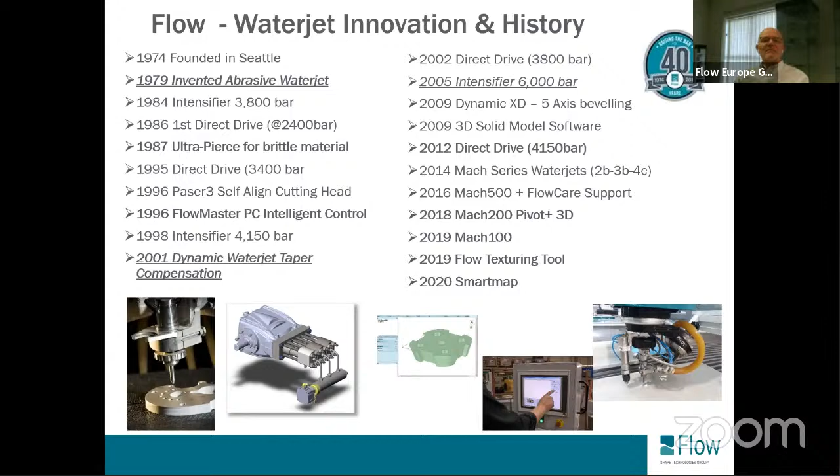One of the reasons that companies do choose to buy Flow Waterjet is that we make everything with the system. It's the Waterjet machine tool, the control software, the ultra-high pressure pumps, of course, and the cutting edge technology, similar to what you see on the screen with the Pivot Plus used in the stone industry.

We put a huge amount of money back into R&D every year, and that drives the technology, not just to keep Flow ahead, but also to benefit our customers.

And for our success, we've built on our customer service, our technology leadership, of course, and we've driven product development. We operate globally, so you will always find Flow representation and Flow support wherever you are in the world.

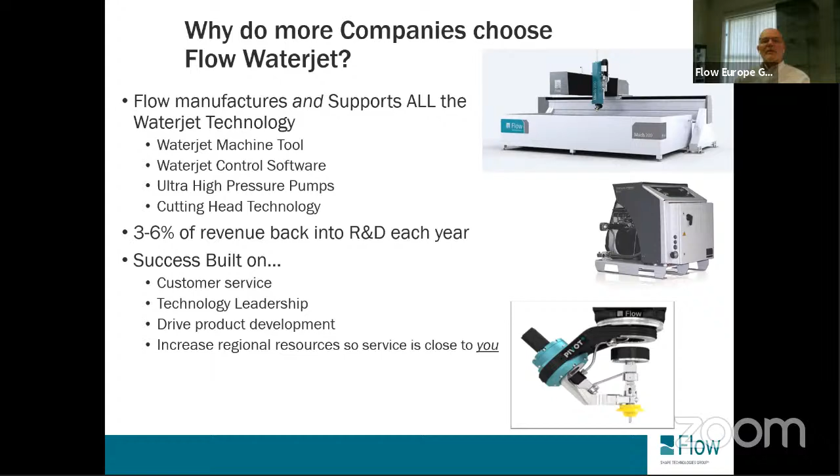Of course, we're here today to talk about very much the stone industry, and Flow's been involved in this side of the market for a long time. Anything from cruise ship interiors, aircraft, composite panels, countertops, and latterly engineered stone, where our technology has very, very real benefits.

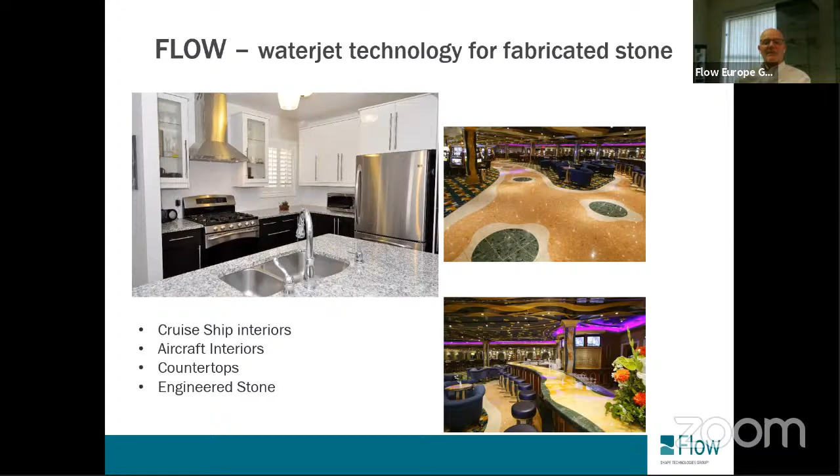We have a standard range of machines, and within that range, we have options that we tailor to the customer's needs. We're also one of the very few people in the industry that would make the direct drive pump technology and the intensifier technology, and we choose the best option for the customers.

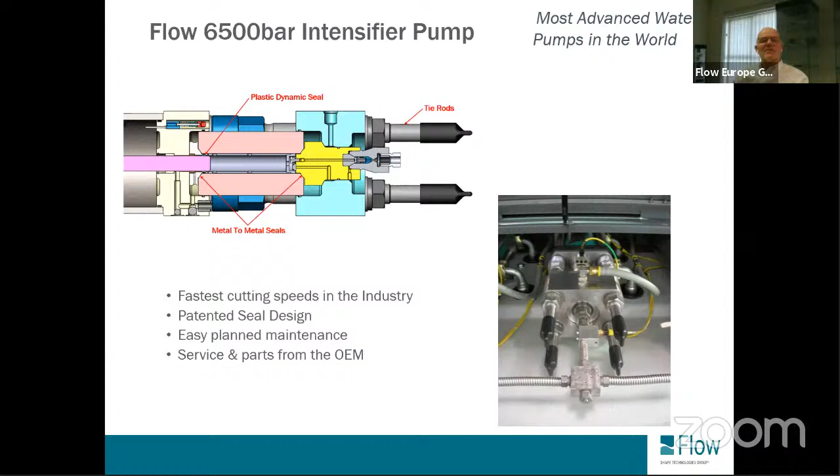Direct drive and intensifier basically is still taking 4-bar inlet water pressure and building it up to 4,000 or 6,000 bar, but they do it in different ways. The intensifier we can use for 6,500 bar for the fastest cutting in the industry.

But generally in the stone industry, glass industry, composites industry, the pump of choice is the direct drive Hyplex prime pump. It's 92% energy efficient, which means you need less electrical energy to get the same result.

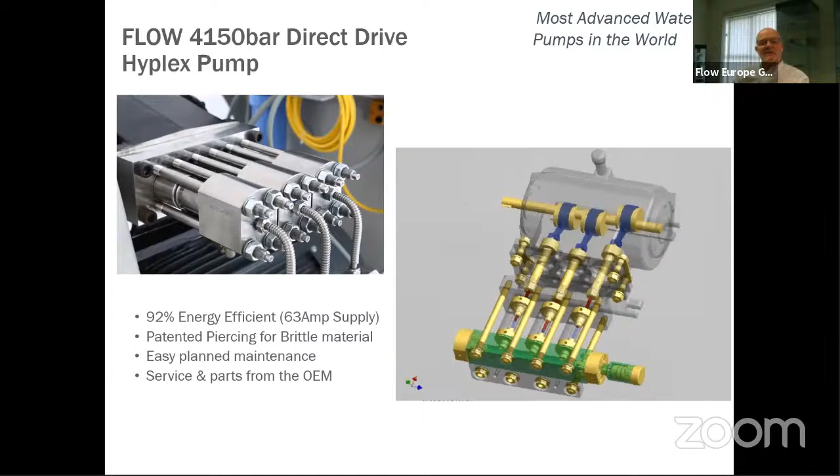A big part of what we do is support. So we mentioned the Flow Technology Centre, and of course, with our single point support, we have field service engineers, we have regional technology centres.

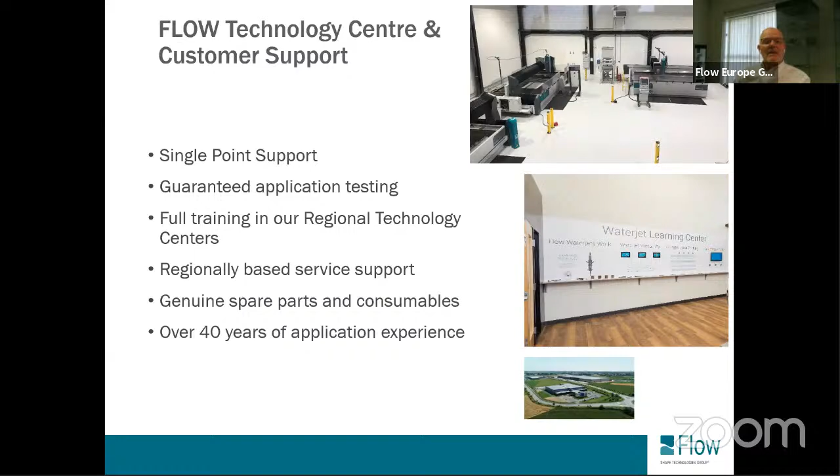And for the customer service side, as well as the engineers, we have customer service people who will help with spare parts. We have an internet web shop.

And with our FlowCare service packages, we have planned maintenance and fixed cost of operation, so customers can leave everything to us.

We also have support for legacy systems, which is very important as we have systems over 25 years old working out in the field.

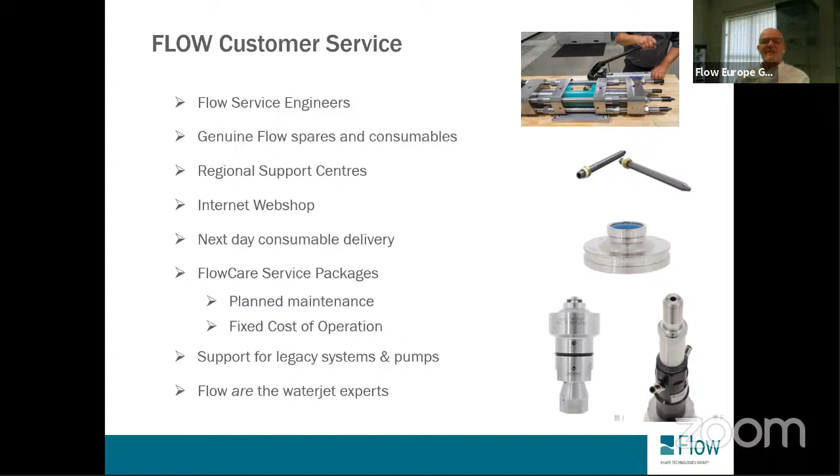So that just brings to the end the overview of the company. We're now going to have a look at the Mach 100 system. So I'm going to run a short video here and just talk around the features that we have.

So this is the Mach 100, which is a precision 3-axis waterjet system. We have hundreds of these installed worldwide. Flow are the OEM, so we make the entire system, including the pump software, cutting head technology.

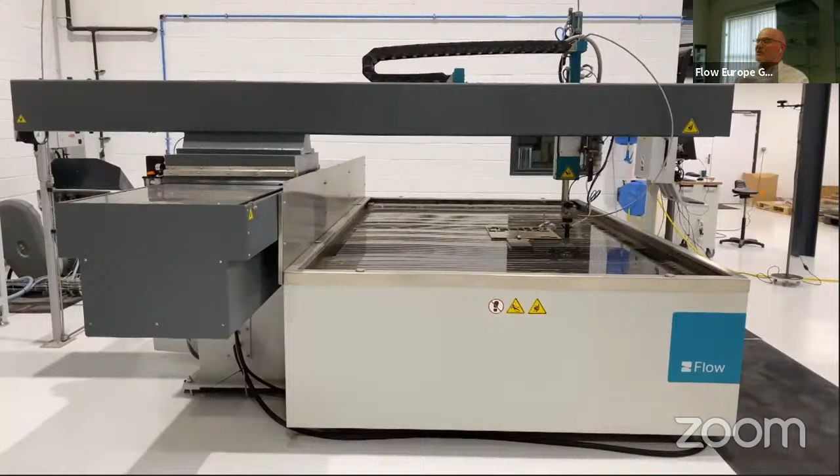The machine shown here in the Technology Centre in Lille has a very robust, fabricated stress relief frame for accuracy and performance, and a separate catcher tank for stability. The very rigid open gantry construction allows three-sided access, which is very convenient for the operators.

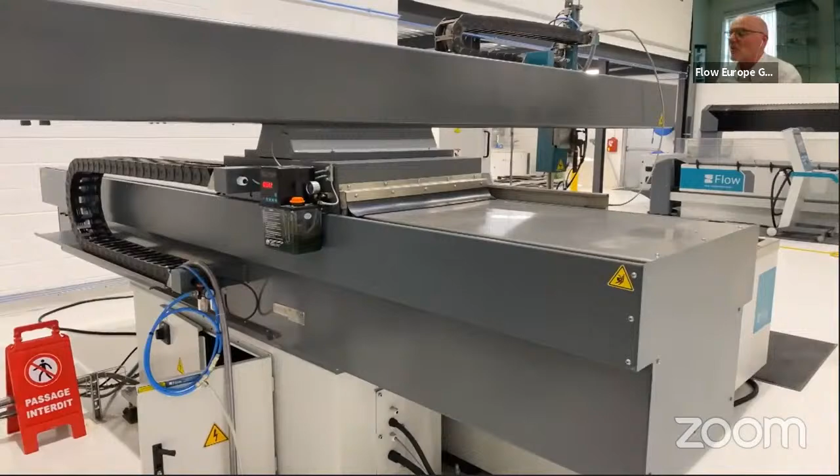And we have an auto lube system, which gets lubrication to the slides and to the ball screw, which are underneath the covers that you see here.

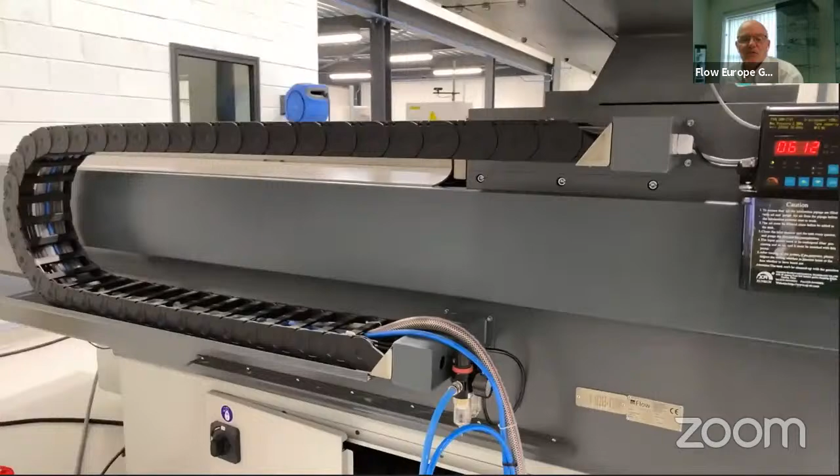All of the Flow systems, the Mach 100, 200 and 500, all use the same Yaskawa AC digital drives. And for the motion system, we're using Omron PMAC motion control, which is driven from the Flowmaster software.

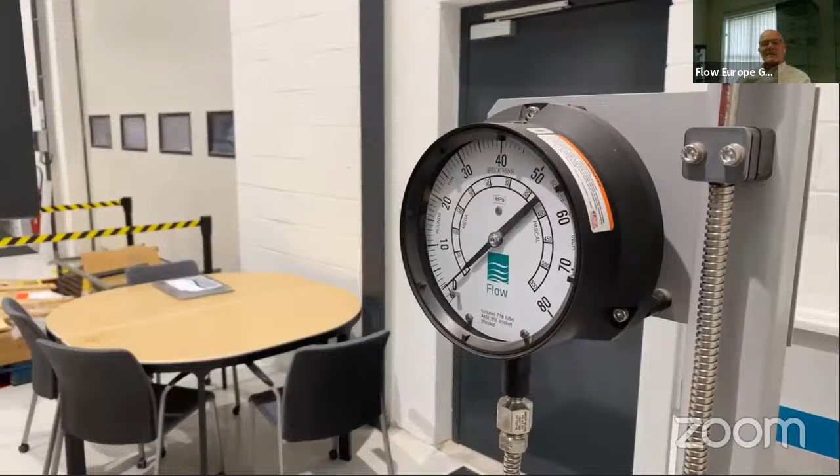There's no G-coding required, no post-processor, so you don't need any experience. You'll just see there the light guard post for safety. That's a CE requirement. And we also have an analog high pressure gauge situated at the back of the machine so the operators can see where the pump is operating.

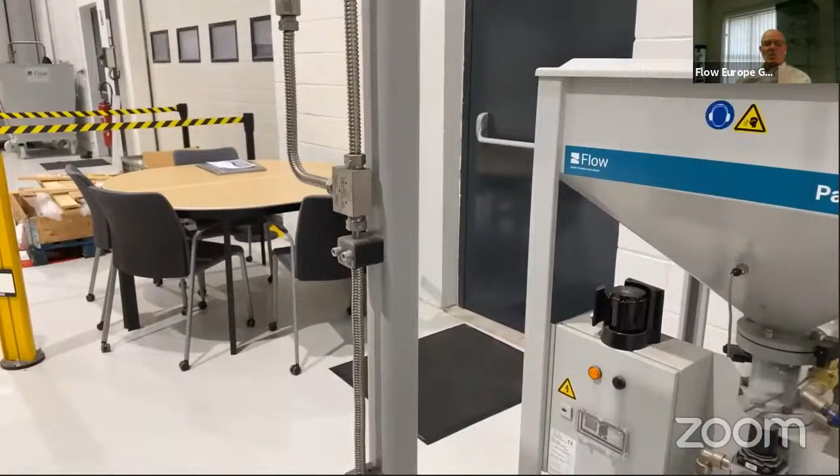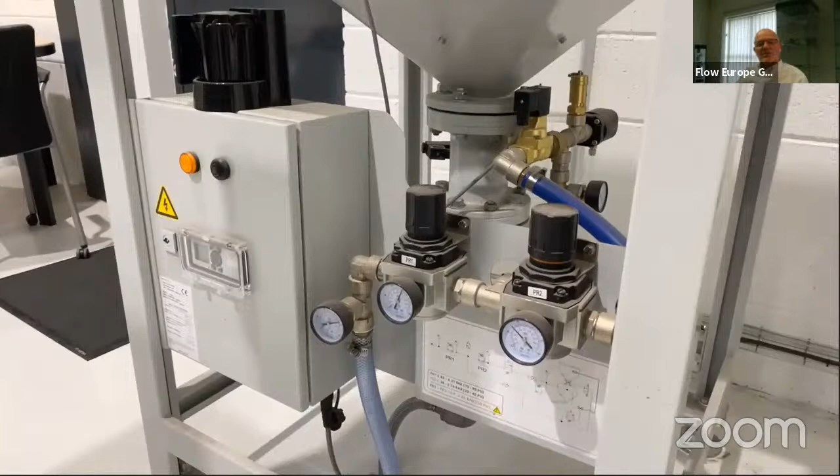Moving on to the abrasive bulk hopper, this is where we store the abrasive. It's garnet abrasive, and it's a dual stage system, so we can actually fill the system while we continue working. We then just use compressed air to move the abrasive from the bulk hopper through the machine and up to the mini hopper, which we'll be seeing in a little while.

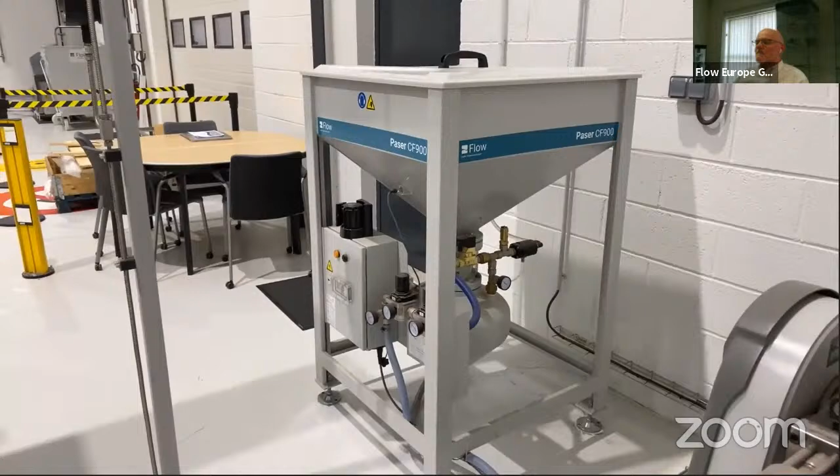Flow is the most widely installed ultra-high pressure technology in the world, and the Hyplex Prime pump is rated at 4,150 bar and is 92% efficient.

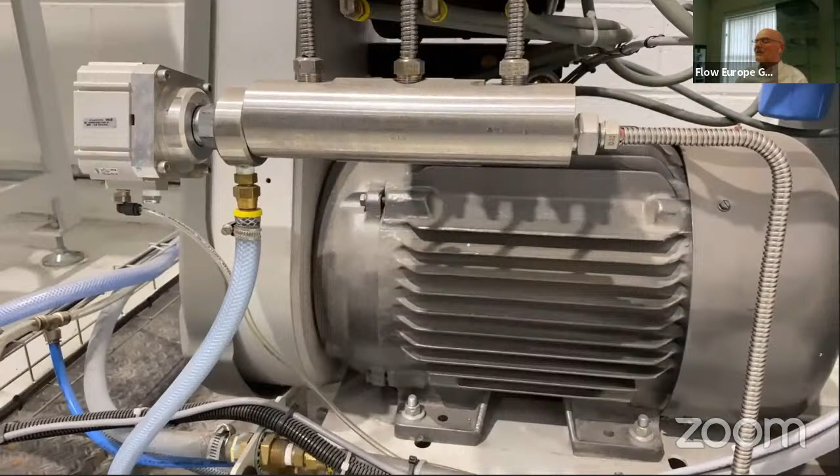Flow's direct drive technology is based on years of experience and requires less power than other pumps and generates exceptional performance. 3 ceramic pistons convert 4 bar inlet water to 3,800 bar continuous operating pressure.

Flow's patented pressure control valve eliminates the need for a second dummy cutting head to balance the pressure or changes in orifice size that other systems may need. It's fully integrated into the Flowmaster control and specifically designed to work with the Mach 100 system, with control of low pressure, high pressure, and diagnostic information.

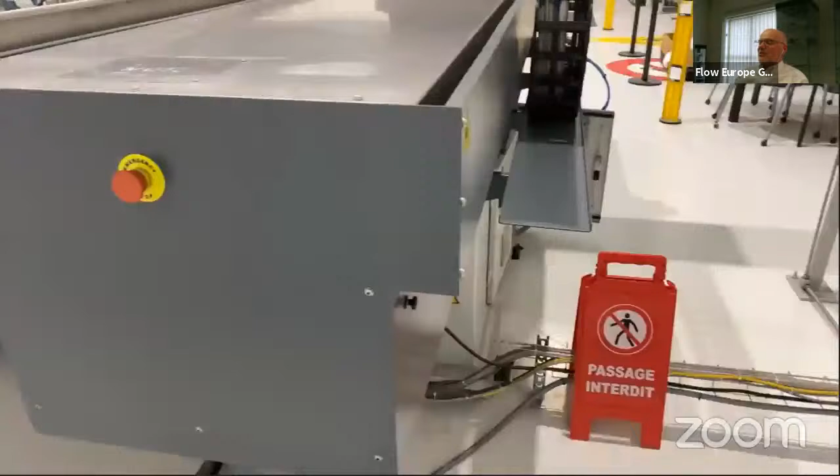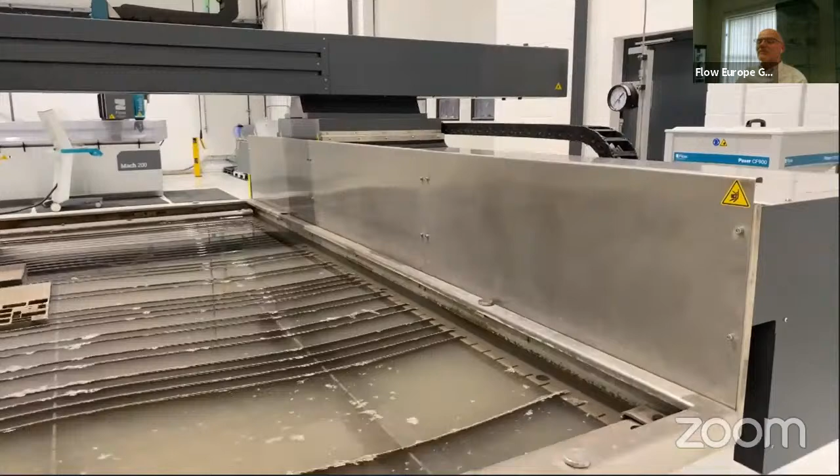As we mentioned, we have a separate catcher tank, and this ensures accuracy and protects the motion system from temperature changes and material loading. The stainless steel slats and supports help protect the cut materials, the slabs, so you don't get any impact from mild steel.

And there's an optional abrasive extraction system.

The PC Flowmaster control is used on all of our machines, and it's using the Smart Stream mathematical models, so no waterjet experience is required. Just click on the material thickness and Flowmaster does the rest.

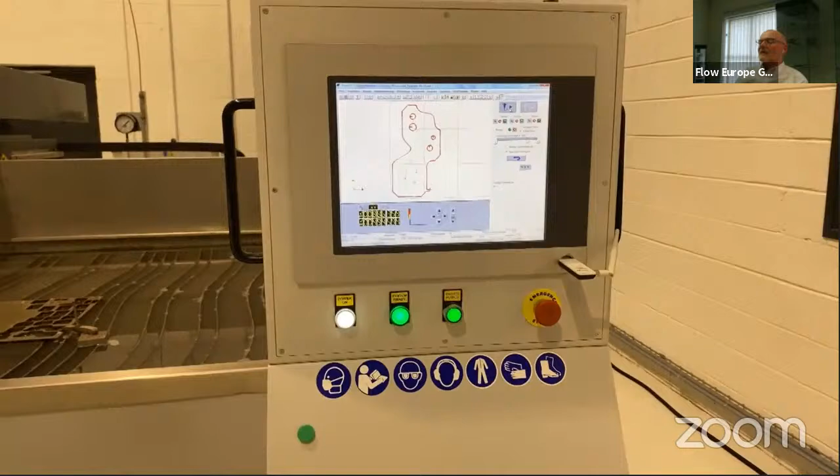The software opens standard geometry and allows all the cutting parameters to be placed automatically.

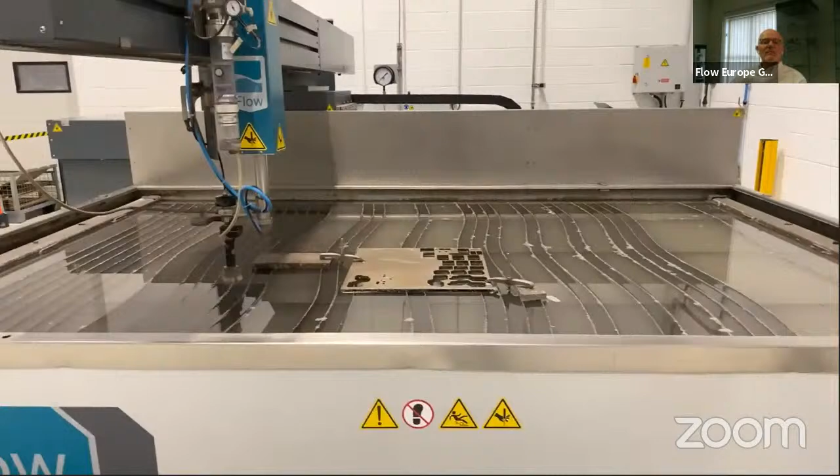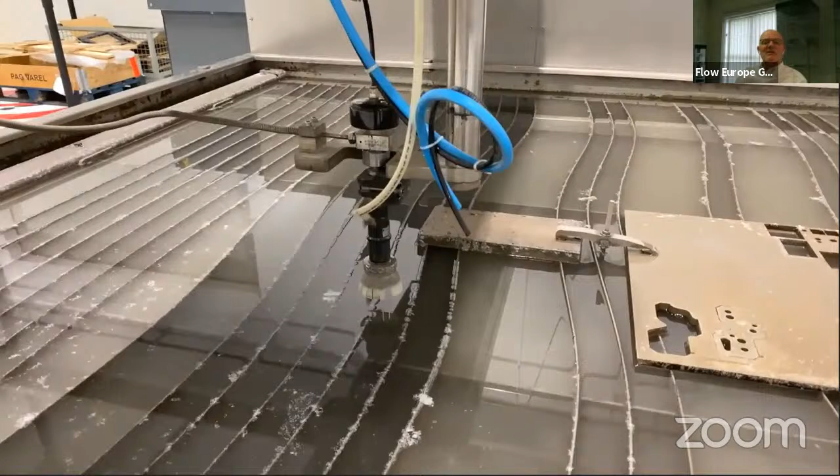The Paser 4 cutting head is the most advanced in the industry with only 2 consumable items. The mini hopper provides exact abrasive dosing down into the cutting head, and the ultra pierce technology is always used for consistent piercing of engineered stone without breakage or damage.

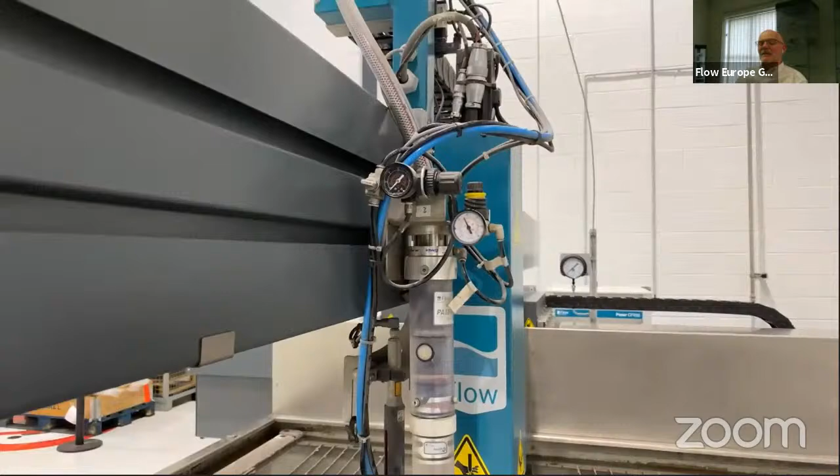This is a Flow patented technology and is used extensively in the stone, glass and composites industries.

The Mach 100 is a complete turnkey system for 3-axis waterjet cutting, with full technical support from the manufacturer, plus the Flow Care programs for operation.

This gives a planned maintenance schedule, delivered consumables, and of course we have the guaranteed cost of operation.

We're just going to move on now to an exciting feature that's been introduced, which is the Flow texturing tool.

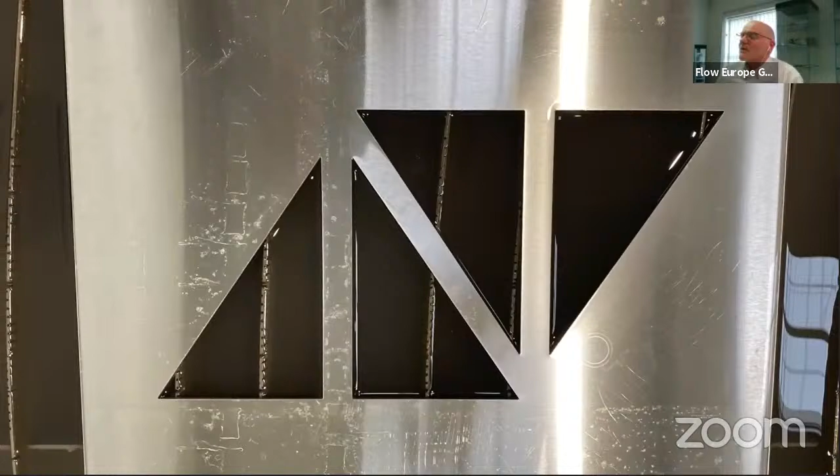The Mach 100 system can simply and quickly be changed from a cutting machine to a texturing machine. The air-driven rotary head with 4 nozzles uses pure water, so there's no abrasive.

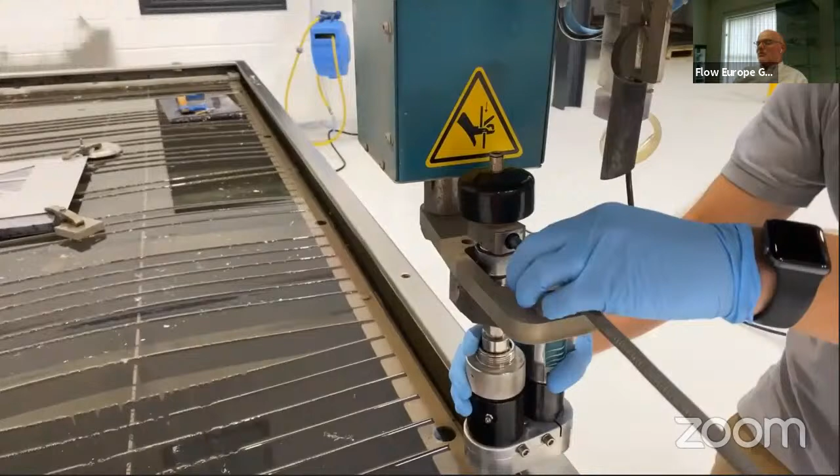The texturing tool utilizes the standard cutting head mounting bracket and the high pressure fittings. We're also using the standard air fittings that we're using for the ultra pierce and for the cutting head. So changing over is about a 10-minute job.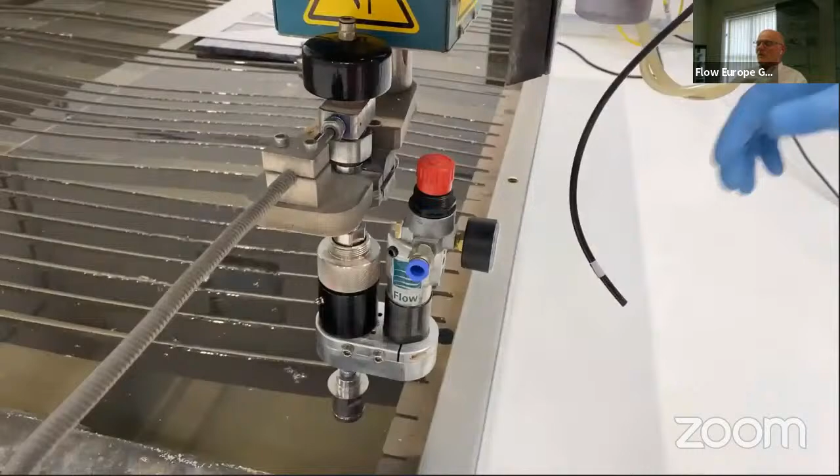So positioning the slab onto the table, it can be positioned anywhere on the bed. We have up to 10 programmable home positions, and this makes it very convenient if we just want to do a small job with a large slab already on.

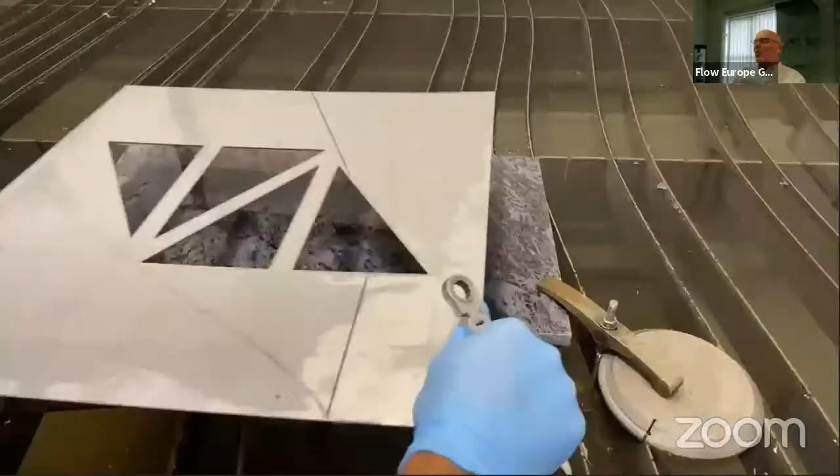Positioning the template or the stencil over the top of the slab can be referenced to an edge or to a feature, and customers actually use the abrasive water jet to cut the templates. So actually setting up 2 edges to align with the slab is easily done.

Simple clamping holds the template and slab in place. And once it's clamped, we can save and check the home position for reference.

As there is very little force involved in the texturing process, the clamping only needs to be very light and there's no damage to the material. Of course, the slats and the clamps are made from stainless steel.

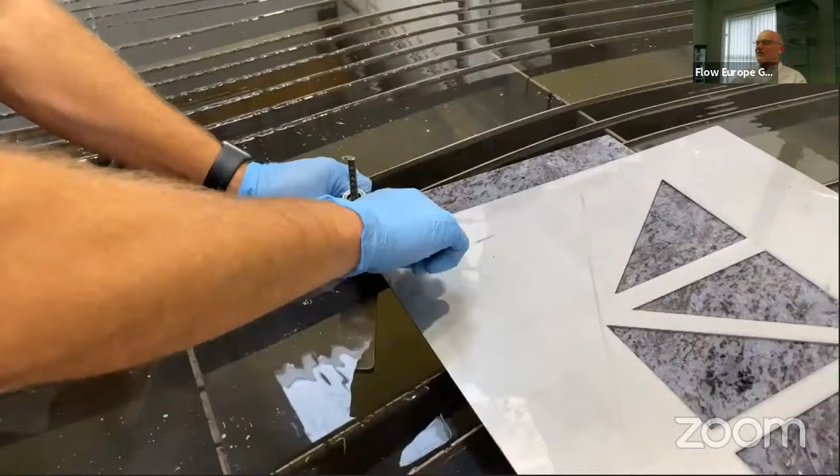With the slab prepared, the operator can move to the software for creating the movement pattern or sweeping program.

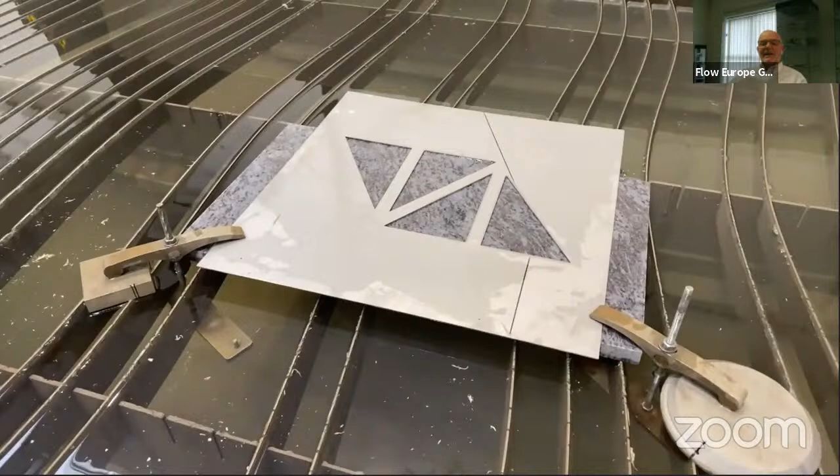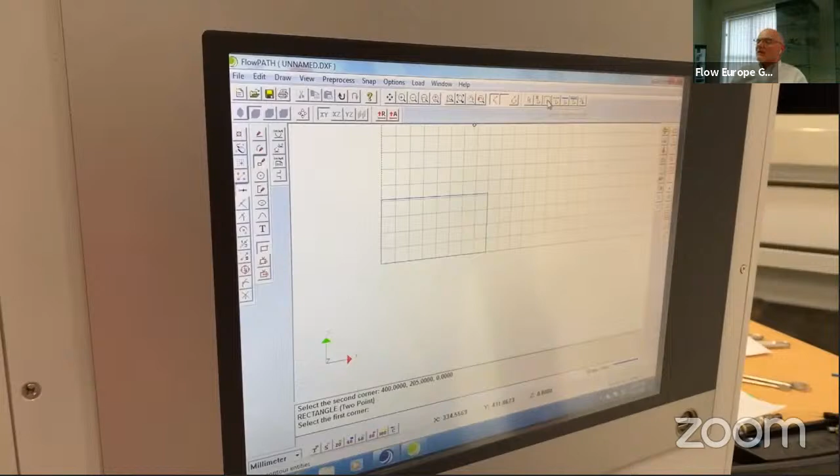So on the Flowmaster screen, this can be carried out at the machine or it can be carried out offline in a production office. The operator will create the slab shape, and in this case a rectangle, purely for representation and reference when they're creating their sweeping. It won't be cut.

For the sweeping path used in texturing, a single line is drawn to start and to use as a reference. So we can see that we're overlapping the dotted rectangle, which is our slab.

We then select that line, and the operator has an array function where we can enter a number of rows, columns, and the distance between the lines to create the array of lines.

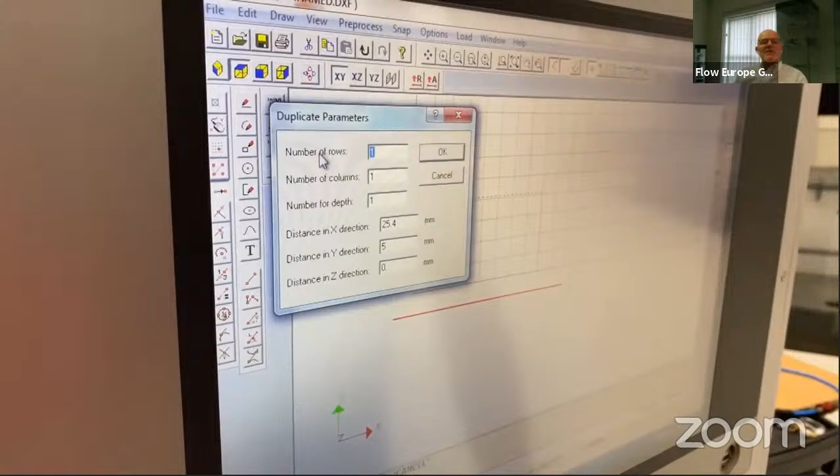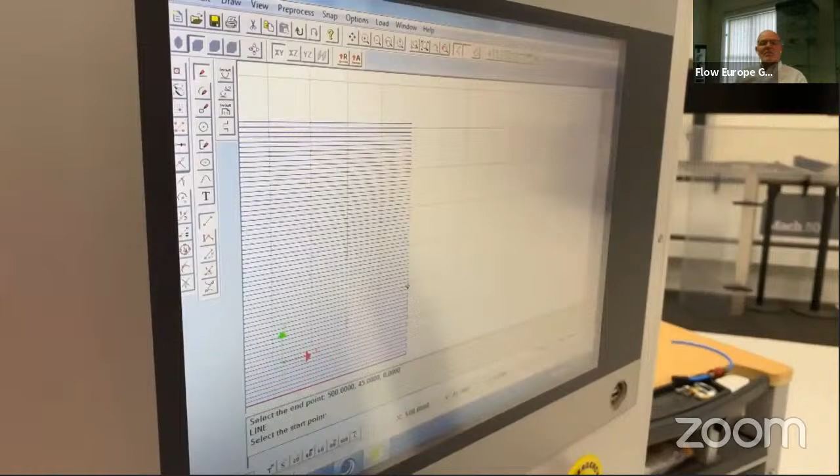The operator enters 20 for the number of lines and presses OK, but we can see that it doesn't actually cover the rectangle. So the operator goes back and changes that to 60 lines (sped up for convenience). Now we can see the number of lines has covered the rectangle, and the last job is just to join up the lines so that it's a continuous sweeping path.

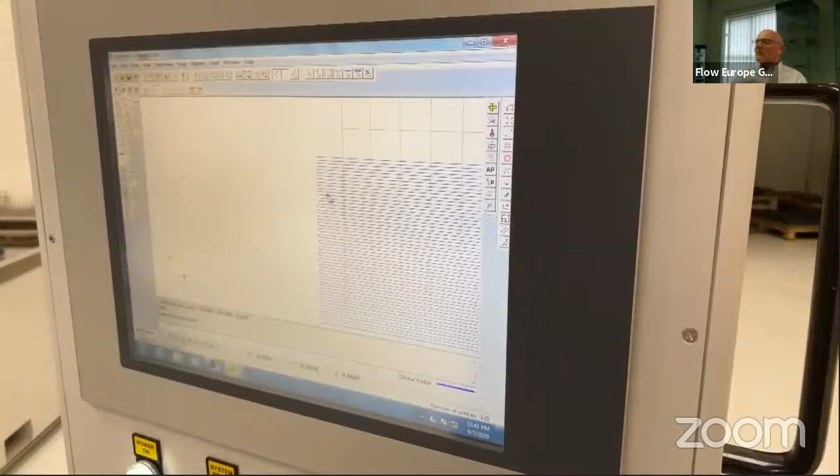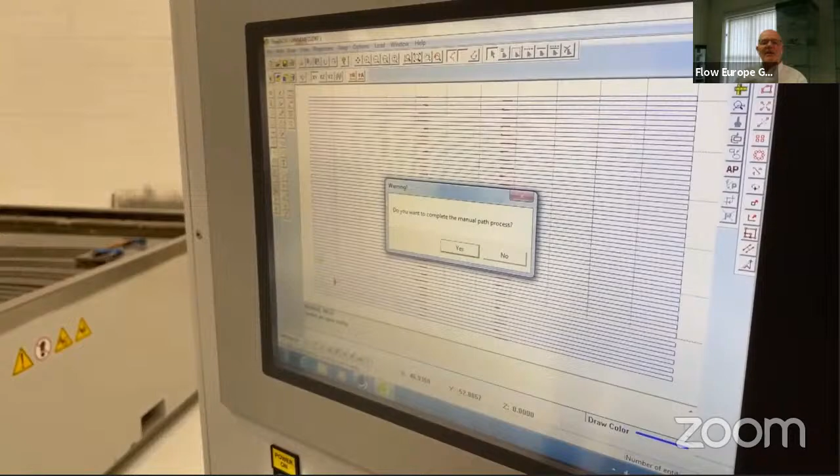We can then export that path as a cut program, and we'll be opening this into Flow Cut to start the texturing process. Just a couple of clicks to go through. Do we want to complete the process? And then we'll move on.

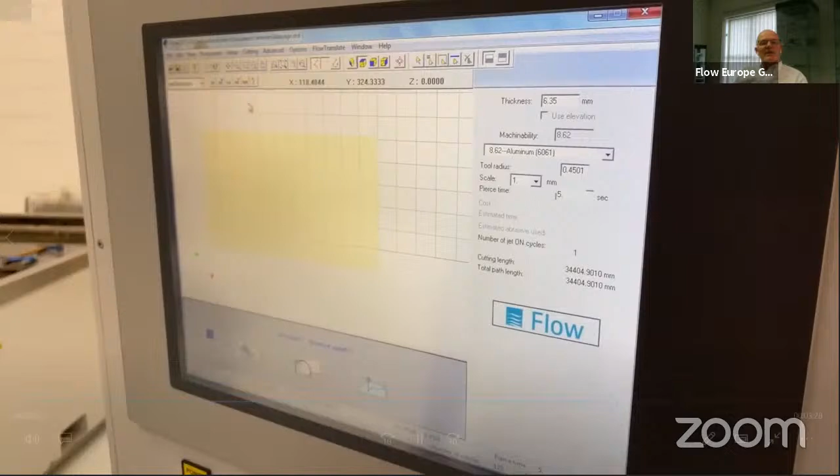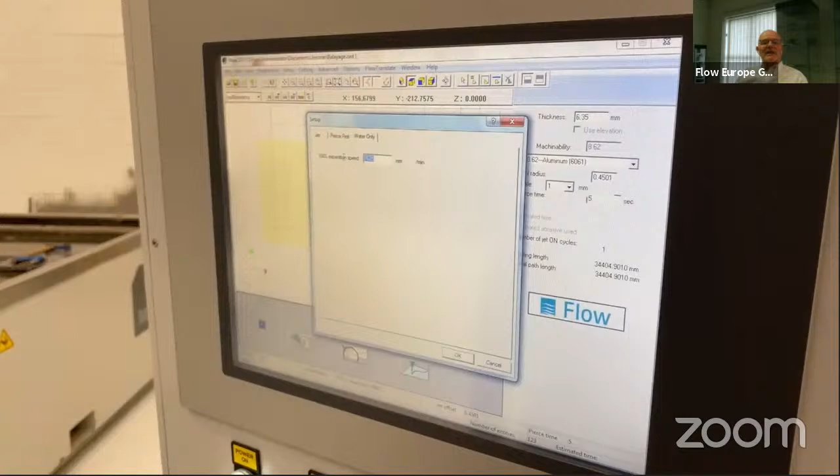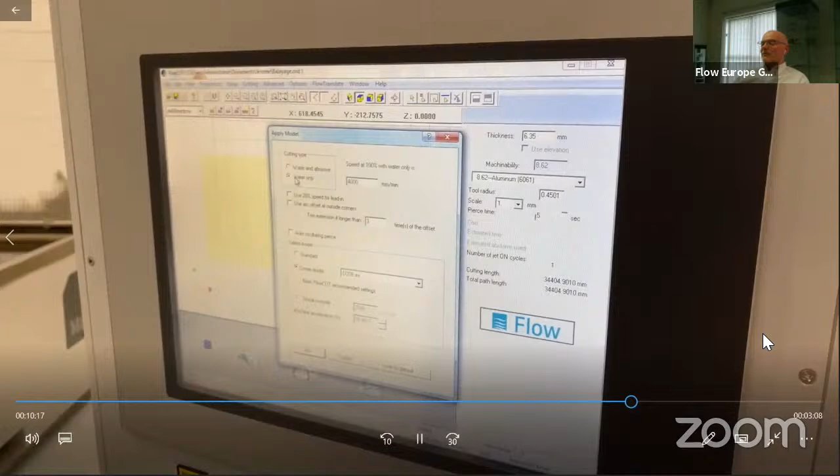So now we've opened in Flow Cut. We've changed the color from blue to yellow, indicating we're going at 100% speed. In the software models, we're going to select water only, no abrasive used. In this example, we're using 4,000 millimeters per minute. As an example, for black absolute, you might use 750 to 1,000 millimeters per minute, and you can go up to 5,000.

Once these parameters have been put into the system, we're now ready to start the process of texturing. The operator will switch on the pump in low pressure, select the water and the vacuum, and then the machine will go to home position.

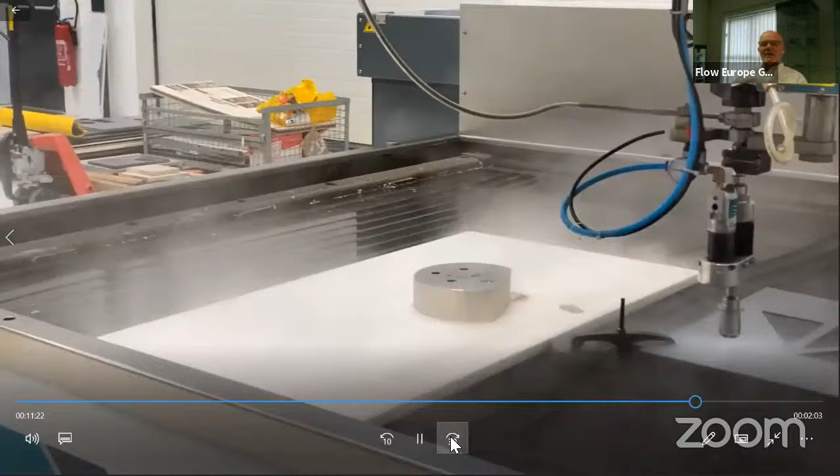Now we can see the head moving in the sweeping program up and down over the template. There's no damage to the template, but it will be removing the surface of the stone. In this example, we've removed the splash guard and the protection so people can see the rotary head. Of course, in operation, there's an enclosure that goes around the rotary head.

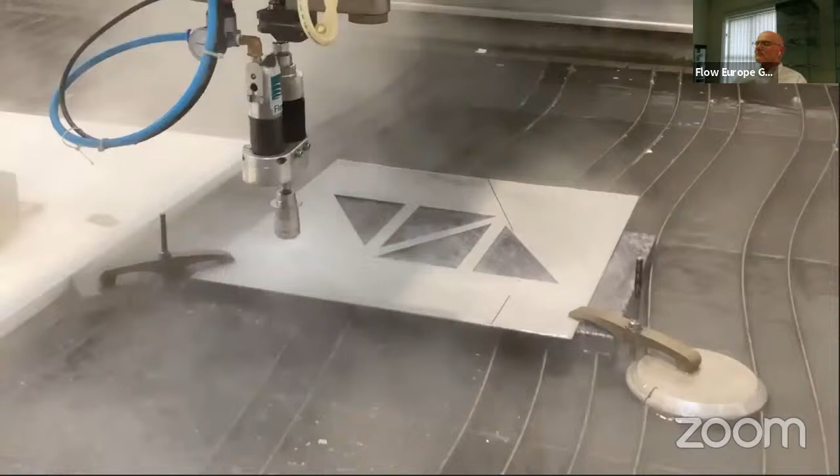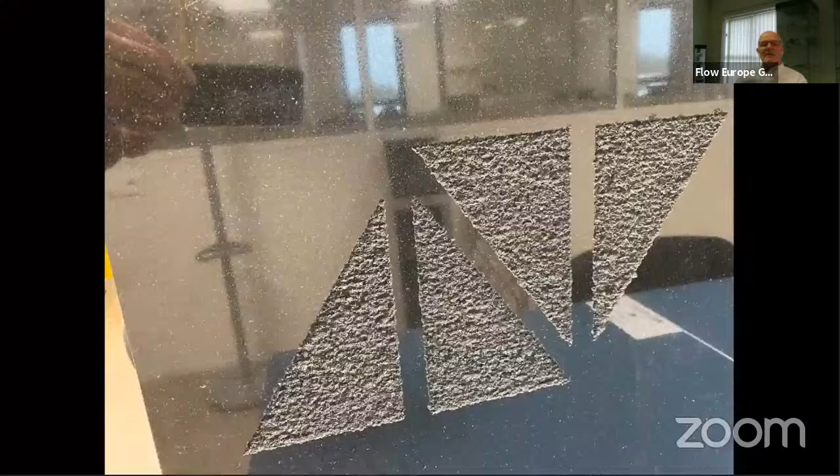After we've passed through a few times, we'll show some examples of the result of what this looks like after going over the template. In aluminium and in stone, we get very, very good results and very consistent removal.

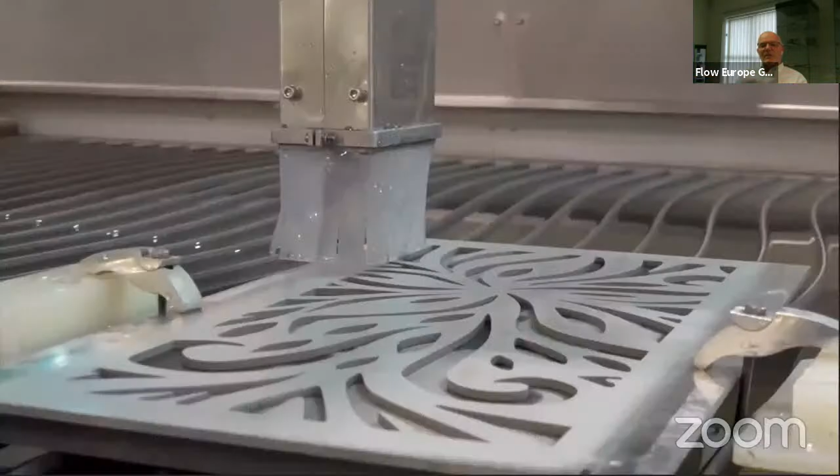The next movie was actually recorded at Verona in 2019, where on the booth we had some very complex geometry. We were looking to show the visitors what we could do, even with very complex shapes on different materials, using the flow texturing tool.

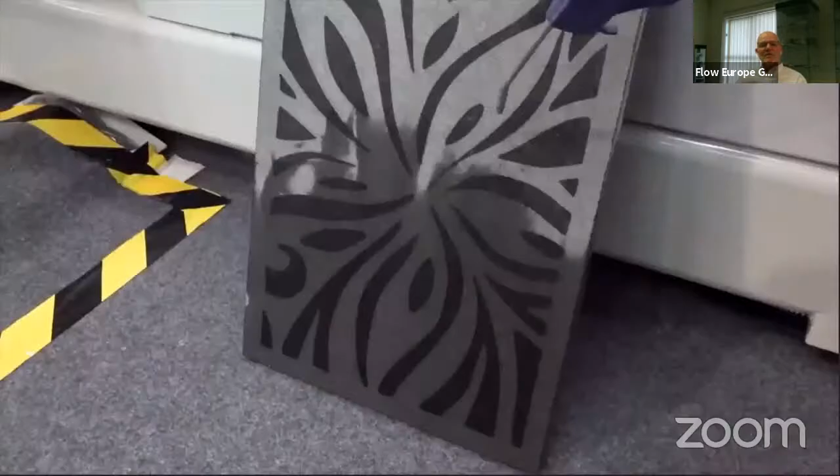As we can see, the detail and the quality is exceptional. So there we have the Mach 100 as a cutting system for stone and as a texturing tool for stone.

So what we'll do now is move on to the Mach 200. The Mach 100, of course, was the 3-axis waterjet. And hopefully everybody can see my new movie that's come up.

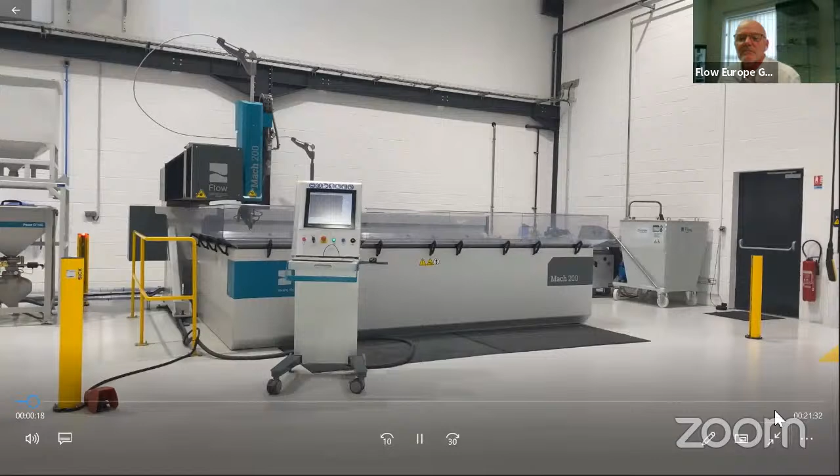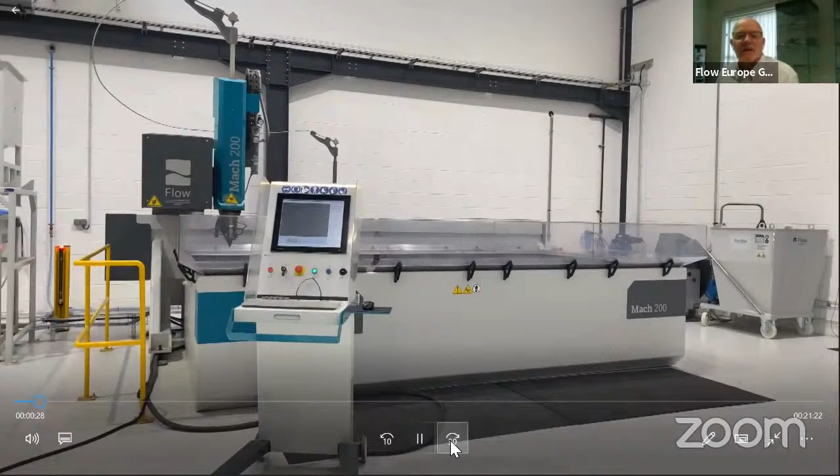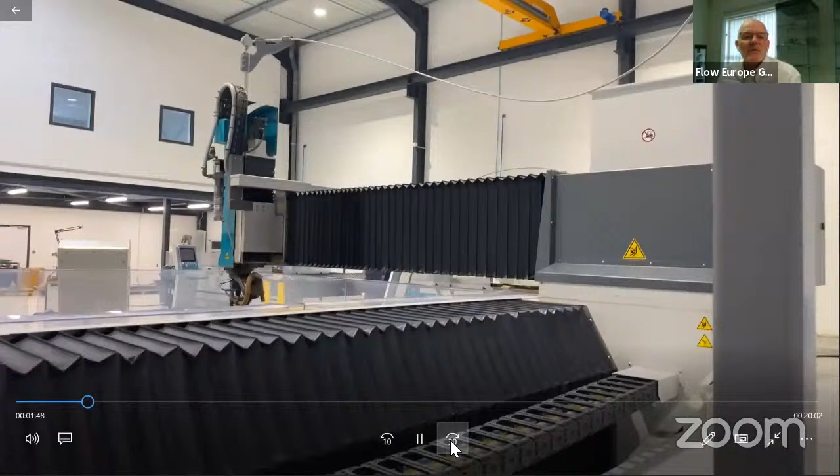As with the Mach 100, there are some very common features in terms of design and technology, so we're going to walk through this. You can see that the frame is bigger and stronger, so that we can take the 5-axis wrist. We wouldn't put the 5-axis wrist on a standard 2D machine. We have protection bellows. We have the bulk hopper.

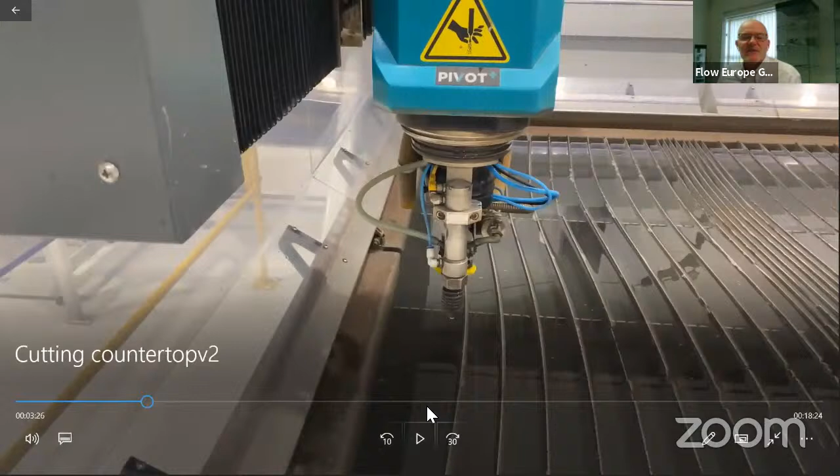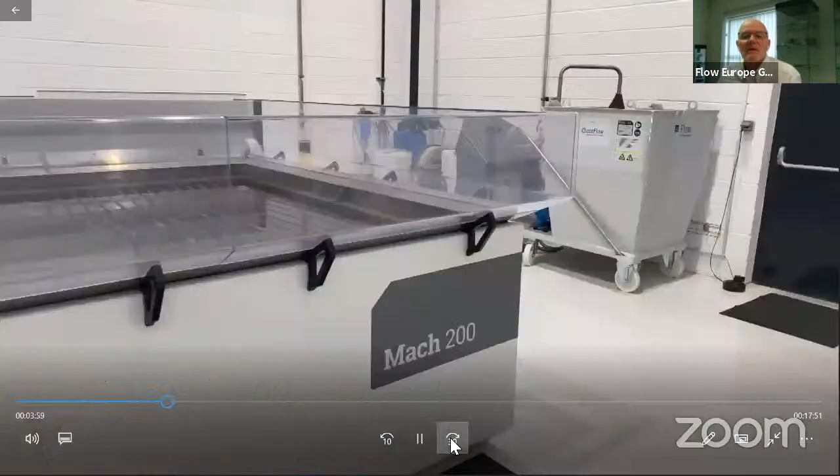In this case, we have a different cutting head. We have the 5-axis wrist, which allows us to have 60 degrees of motion to be able to do 45-degree miters. We also have the height setter with smart mapping. Again, the pump is standard throughout the flow range. On this machine, we have the splash guards as standard for operator protection if we're mitering.

Of course, now that we're using 3D shapes, we need software to suit that. So FlowXpert is a 3D solid model, which allows us to open either client files in other formats.

So it could be Inventor, it could be Rhino. And of course, you can draw items from scratch. Very often people will take a digitized templated image from a client that's in 2D, and then we extrude that into 3D to give us our shape.

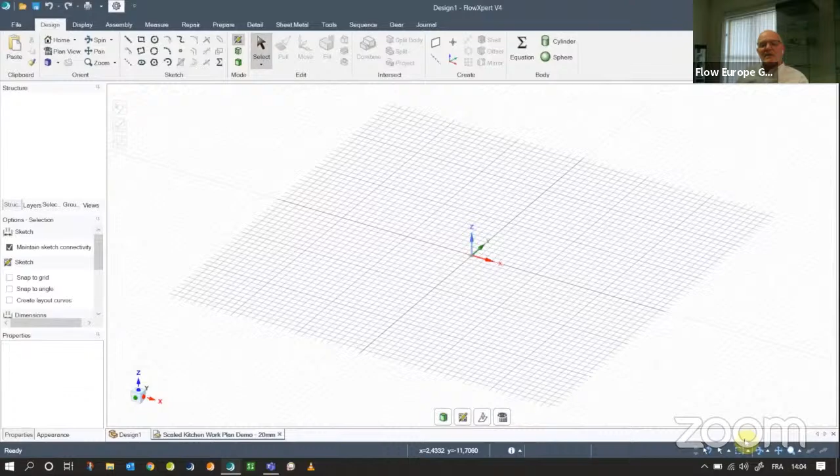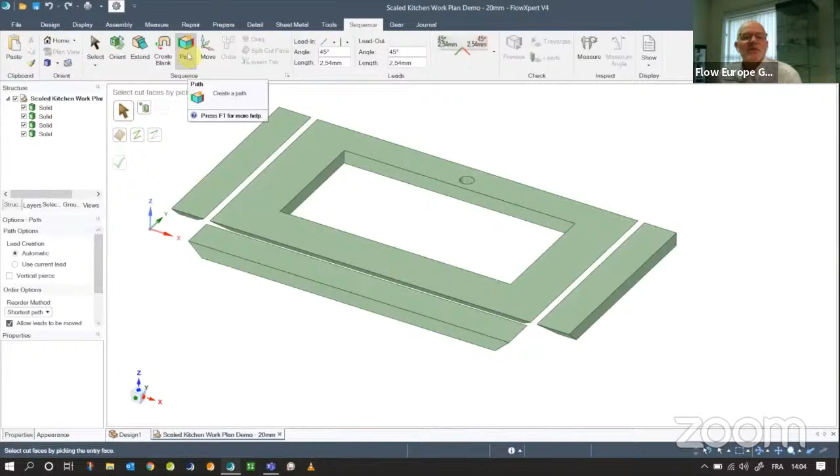So we've taken a scaled down countertop with a bowl cutout, a sink hole, tap hole, and with miters on 3 sides for downstands. We simply indicate the items that we wish to process. The software looks at the surfaces, puts the path on, and automatically does all of the 5-axis programming required to produce a good quality part.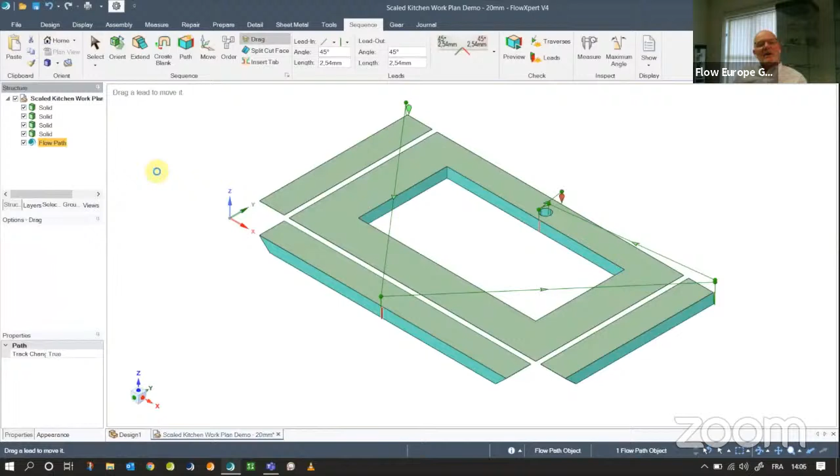We export the part, as we did with the Mach 100, into the ORD file, the ordered file, and we open that in Flow Cut at the machine. So the FlowXpert software is offline, and now we're back at the machine. Flow Cut, as we saw on the Mach 100, and we'll be opening up the 3D file and getting ready for process.

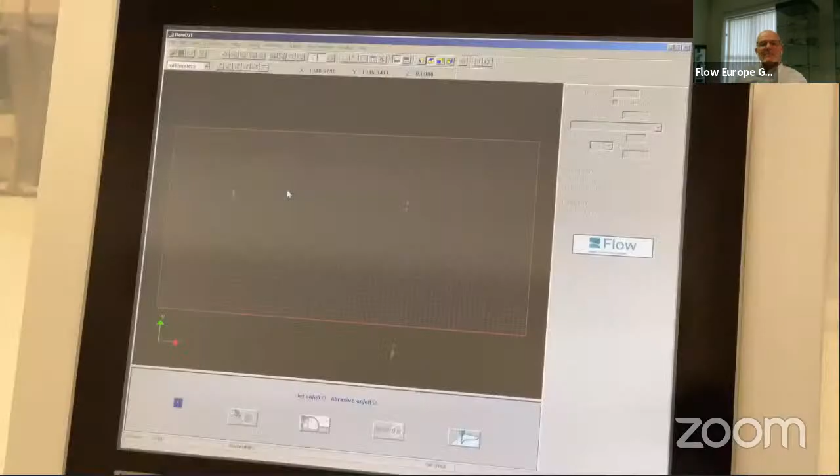One of the interesting features on the Mach 200 is the height setter with the smart map function, which is very important for maintaining accuracy on miters. The operator is just clicking on a material list, selecting black Dekton at 20 millimeters thick, and the software automatically has all the speeds, feeds, and piercing data ready for this material. The operator does not need to know this information.

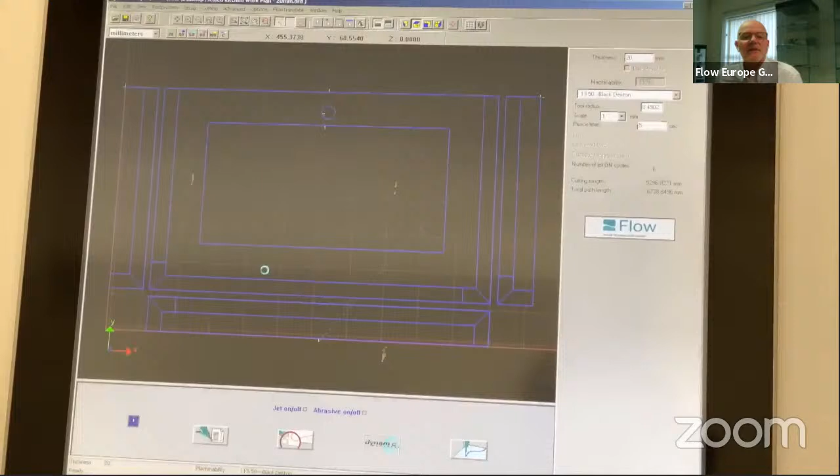They're going through the standard models to click and check. Before we cut, we carry out the smart mapping, which means we can go around the slab and check. On the software there's an easy setup that allows us to do this, and this example will show how the system goes around and checks the height.

If the slab was perfectly flat there'd be no issues, but you can get deviations on slabs. So this will give an extra Z movement so that the machine is always in the right position as it goes around the slab.

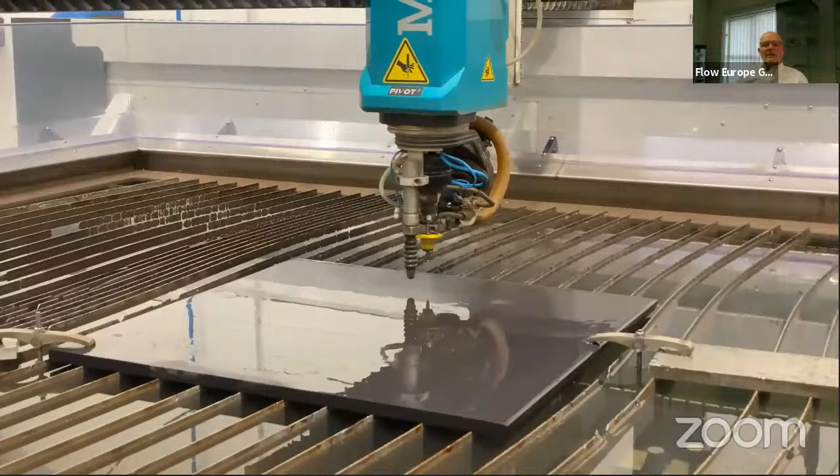Now we'll speed up a little to show you how this happens. You can go on the actual path of the job, or on a grid section to give an overview. That information is now logged into the controller, and the operator doesn't have to do anything with it.

Now we're ready to start the process of cutting our countertop. The first thing we'll do is utilize our Ultra Pierce technology. As we've said before, this is patented to Flow. It was developed many years ago and works extremely well on engineered stone and on brittle natural stones.

We go to the start of every lead-in position and use the waterjet to create a very small, accurate hole through that start. The technology allows the abrasive to be put into the chamber in a controlled manner so that we're always grinding and not damaging the material.

So we can see there's the tap hole start, the bowl start, and then the downstands and the complete countertop. It will go through and do a pierce point at every lead-in, so we'll just move through this.

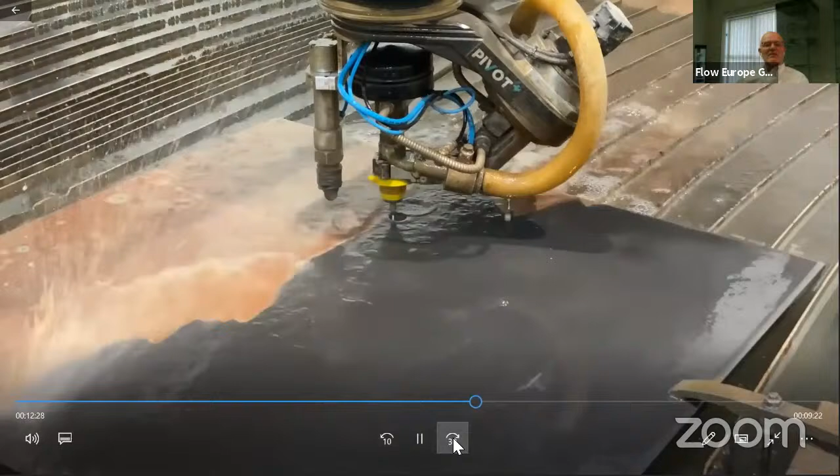Now we're starting to cut the first feature. The machine will automatically have turned off the Ultra Pierce, the pump will be at the correct pressure, and the machine moves to the correct position through the start hole. We can see there that we've got the tap hole with no damage.

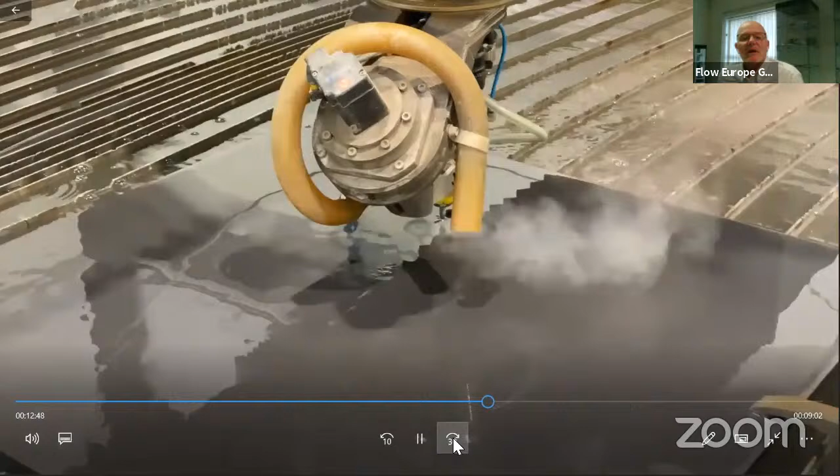Now we're starting to cut the bowl. On the bowl cutout, because we have taper and jet lag compensation as standard with this machine, we're able to produce a very accurate, very straight part. We don't have to worry about taper or underside damage, so there's very little finishing or polishing to do.

As we go around the part, we start to see that all of a sudden we have angles on the cutting. The machine is automatically changing the angle and the speed as it goes through different thicknesses. Obviously if we're cutting on the angle it's not 20 millimeters anymore, but the controller automatically takes care of that.

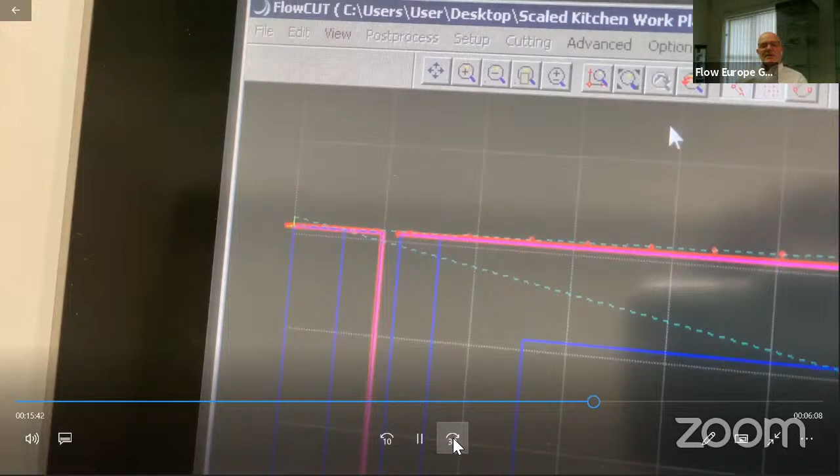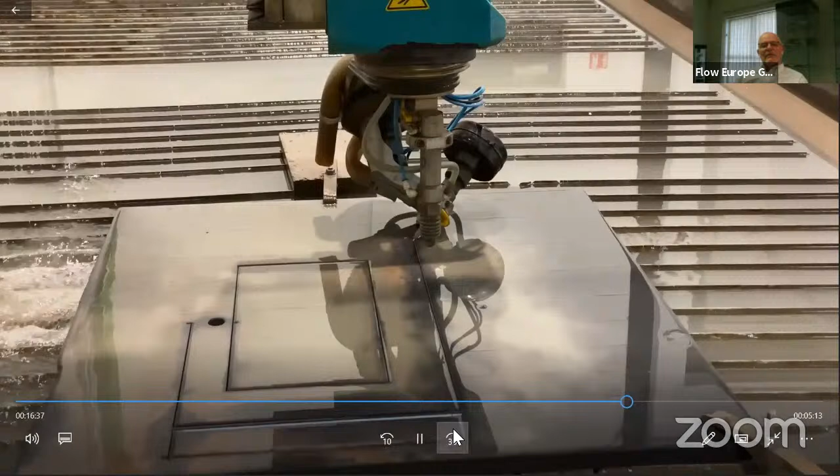Within the controller, we have a red line that shows where the cutting is taking place, so the operator has a very good feeling for where they are on the job. Again, there's no cutting forces involved, so very light clamping on small slabs, and on larger slabs very little need for clamping at all.

Now we'll take the finished item out, put it on the desk so that we can look at the quality and look at the edges.

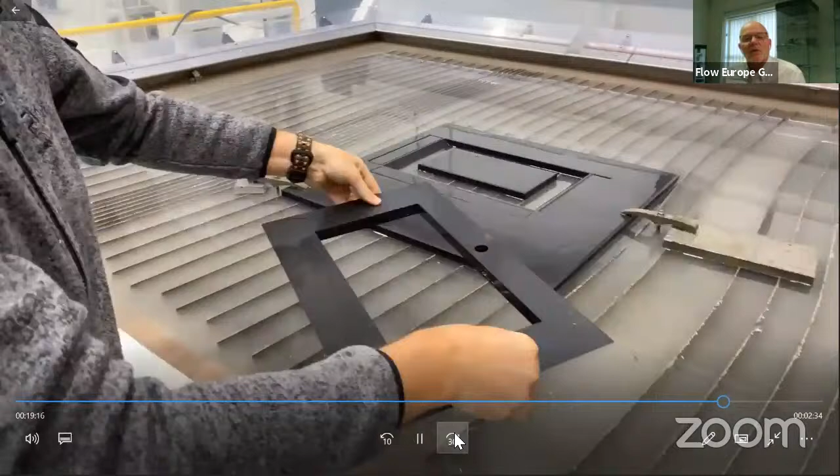In our Flow Technology Center, we have 2 full-time applications engineers who cut customer parts, carry out training, and of course customer demonstrations.

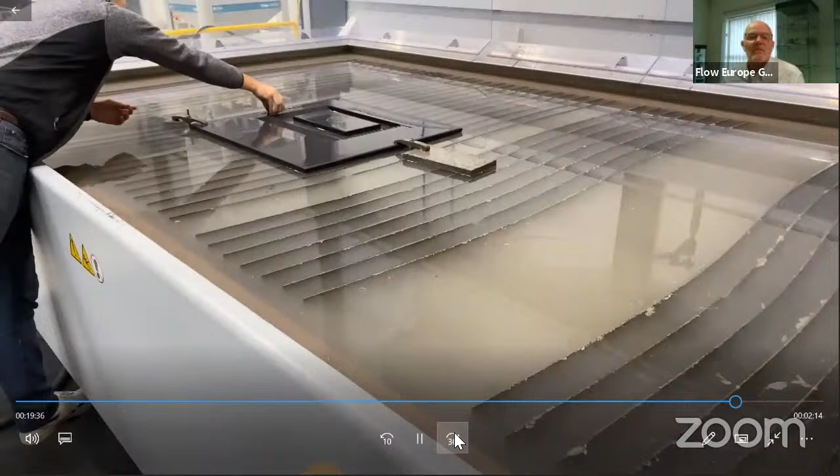So there we can see the edge quality, and that can be altered very easily within the FlowMaster software.

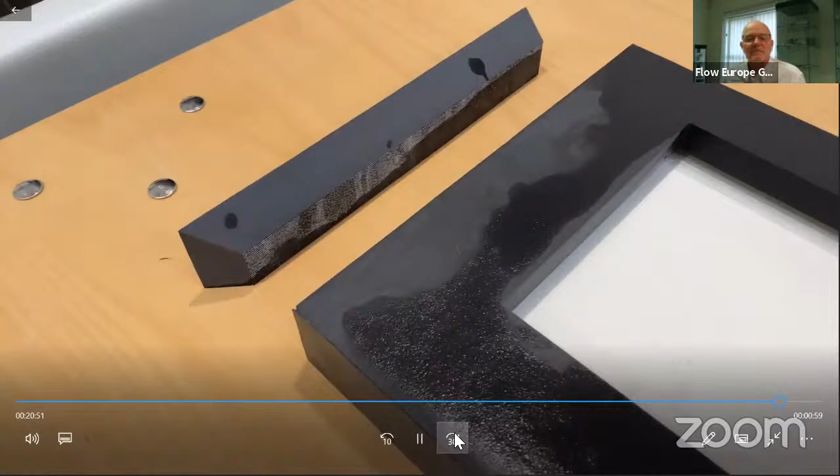We can see the straightness of the lines of the 2 edges that have come together. So the fabrication process should follow after this.

So just to review, this session has covered the important aspects of 3-axis and 5-axis waterjet cutting and showed where the unique Flow technology helps customers who are processing engineered and natural stone.